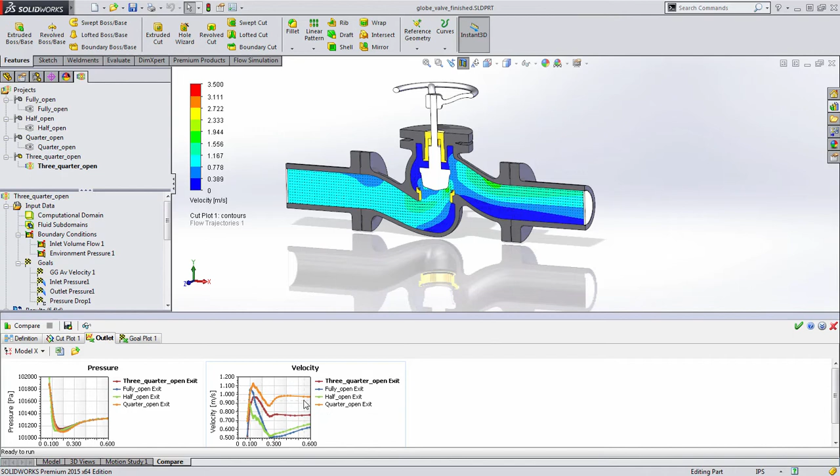We can also plot goal curves or other curve data and compare it across studies. So for example, the velocity along a profile through the exit tube with great visibility and ability to go in and look at results in great detail.

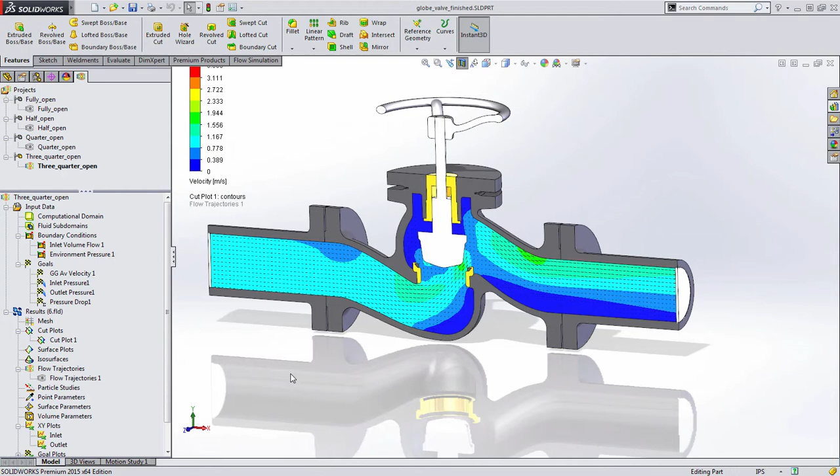So just one of the great enhancements in Flow 2015 to help you in reviewing results data across many different studies. A great enhancement in SOLIDWORKS Flow Simulation is a new sliding mesh for time-varying simulations.

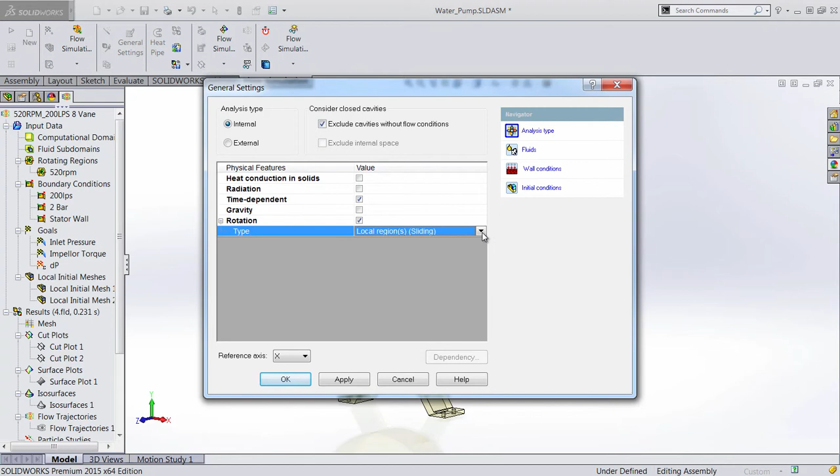This provides greater accuracy for non-symmetrical rotational flows, as well as investigating transient flow effects. Under the settings for the rotation region, you simply select the sliding mesh option to activate the capability.

In this water pump model, we've set up the impeller speed, inflow volume flow rate, as well as indicated where the surfaces are stationary in the rotating region. We have access to a wide array of results to gain greater understanding of the pump performance.

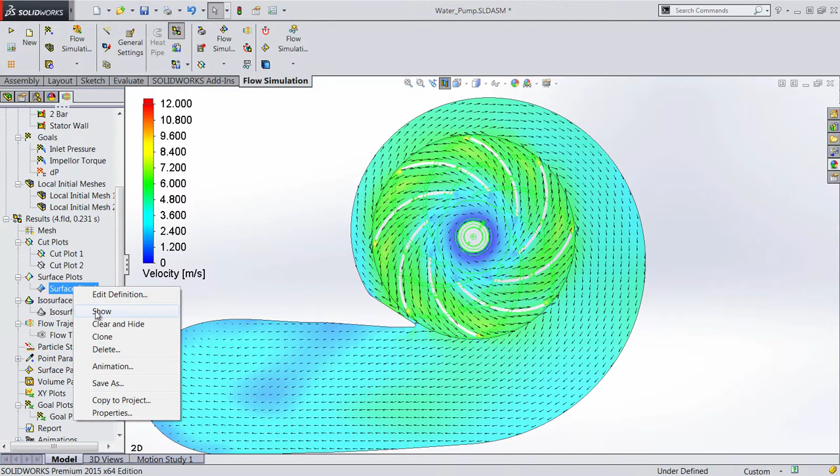We can see the fluid flow relative to the current time position from a sectional perspective, results on the impeller surface, as well as flow trajectories relating to the global reference frame or relative to the rotation region. Because of the housing shape, we can verify fluctuations in time based on the impeller blade position.

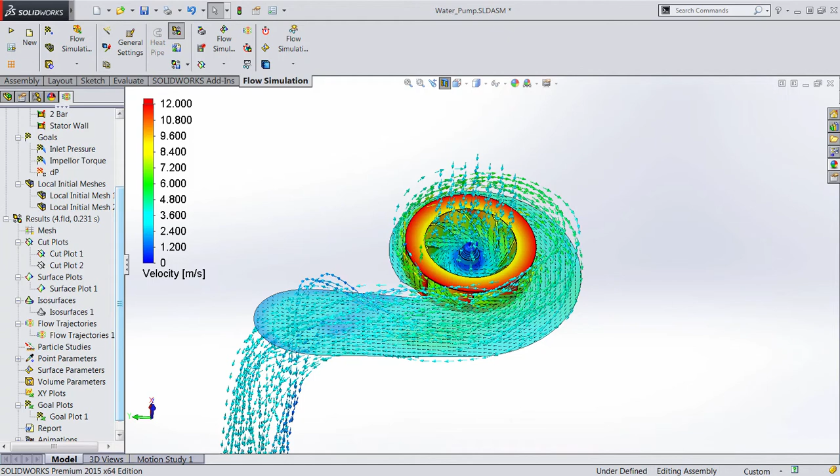By exporting the results to Excel for all of the time steps, we can obtain cyclic fluctuations in the impeller torque, as well as in monitored pressure and velocity in the junction of the exit duct to the impeller housing.

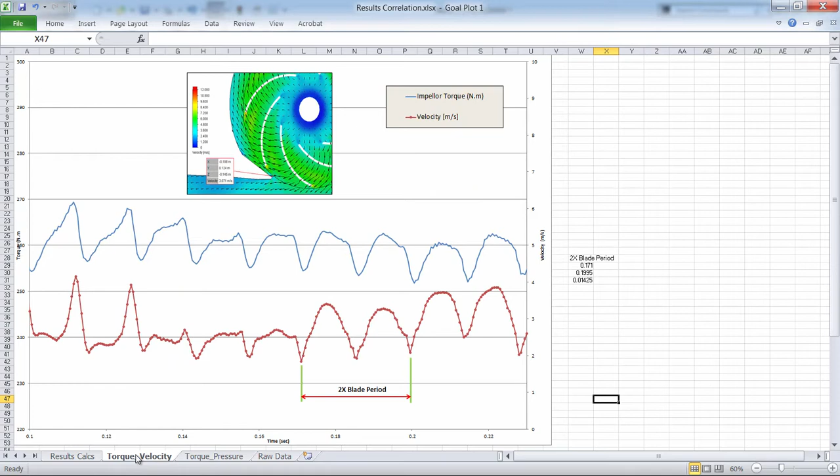We can verify that this is indeed caused by the blades passing this area by determining the period of the cycle. Based on the RPM, we can work out the rotating frequency, and from that the time period per blade, and compare it to the numerical results. We can see that we are within a couple of percent of the input, which is limited by the time step used for the saving of results.

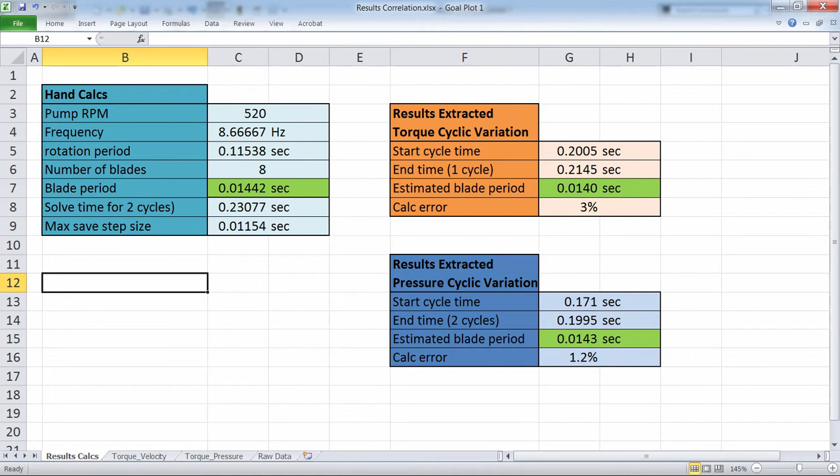However, the best way to visualize the results is with animations by using the Flow Animation Wizard to capture results over the saved time steps. This can clearly show characteristics in the flow. In this instance, the flow variation as the solution reaches a steady state.

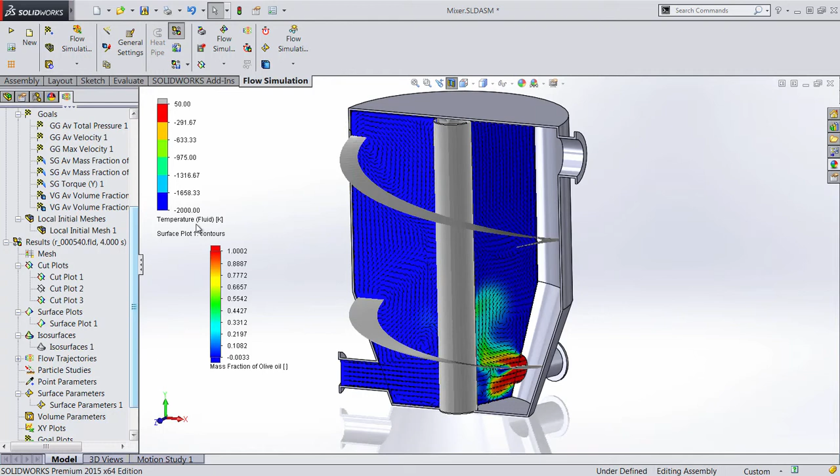In this mixer, we have one fluid being blended with another, and can visualize concentration distribution variation with time. These time snapshots can showcase interaction between the rotating blade and the added fluid. And again, visualizing results through the animation delivers far more understanding.

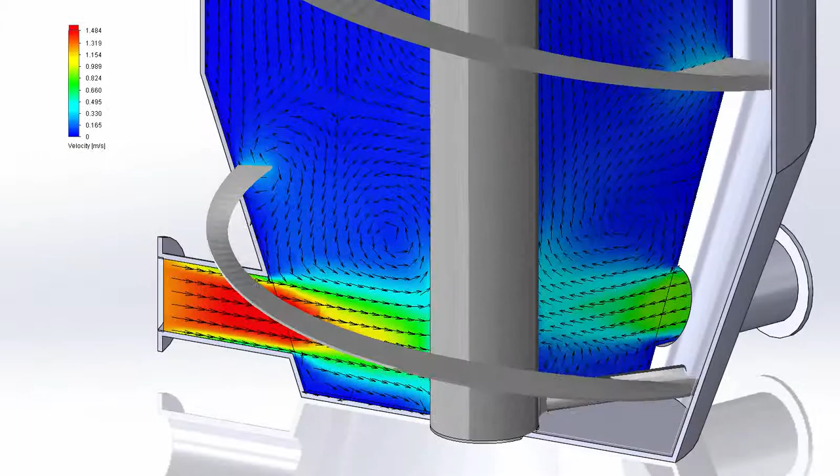The new rotational sliding mesh capability enables you to accurately and easily evaluate time-varying flow performance of your design.